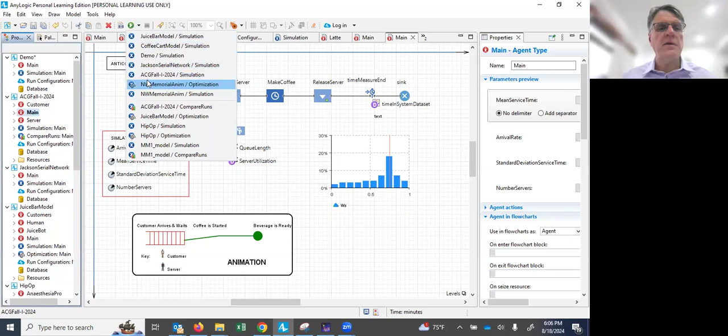I'm going to run it just so you can see how this goes. This is something that I added recently to the simulation. And here we go, I'm going to speed this up. I think you can see what's going on here.

There are customers coming in here, and then when their beverage is being created, they are joined by a server. Let me slow this down maybe a tad. So in every case, you see there's a customer and a server going through together. The servers are the baristas, obviously.

That's what's happening in this animation. This is just a visualization of how customers are flowing through the system here, where they come in, grab a barista, get their coffee made, release the barista, and then sort of head out.

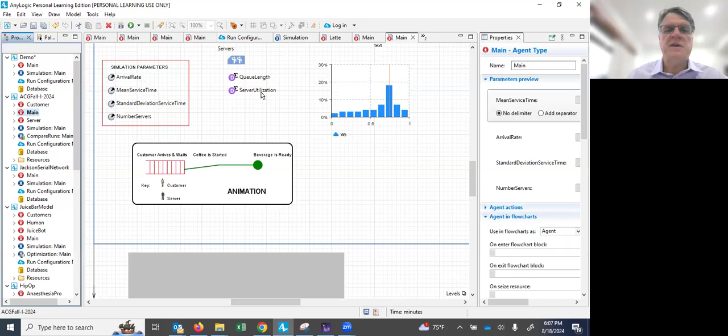Okay, now implementing this thing, what this here is here. Let's just go back and have a look at the setup here. So you can run this in 3D as well. Maybe we should just have a look at that in 3D briefly.

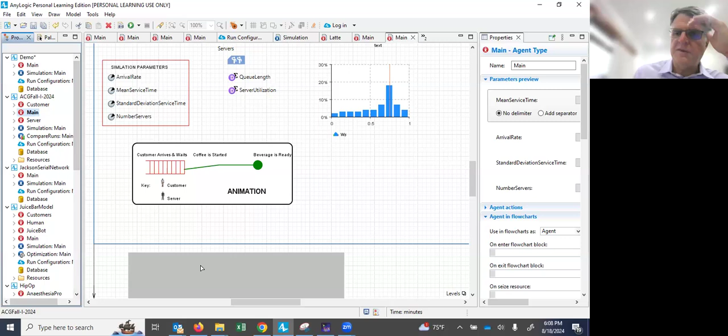I think I've created something that's flat here, so it's not going to be particularly interesting, but you can zoom in here and observe. Hopefully I can get this thing to move. No, maybe not. Well, I hope to do better than this, but apparently my 3D simulation has disappeared. In any case, with a mouse we could do better and observe these, what is a 2D animation here in 3 dimensions in this 3D window here.

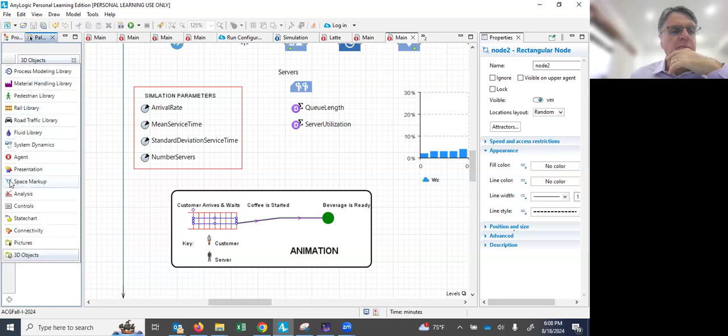All right, so how to set this up? So this first block is actually just a rectangle that I'm coming in from within the space markup palette. So you can see it's one of these rectangles.

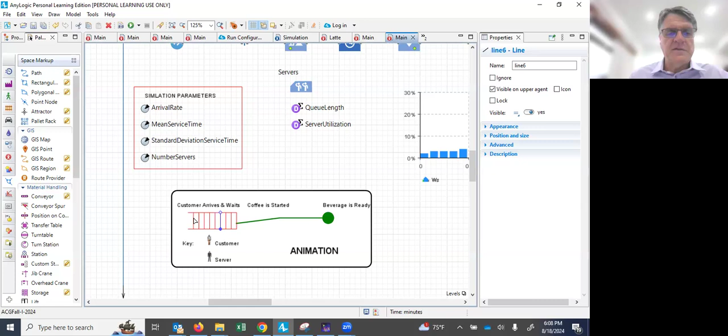And then this here is a path. And this is just simply a large green dot that isn't a particular markup item or simulation block. So this one here, obviously I've just created some additional lines, but it's this rectangle here. We want to see where that connects to.

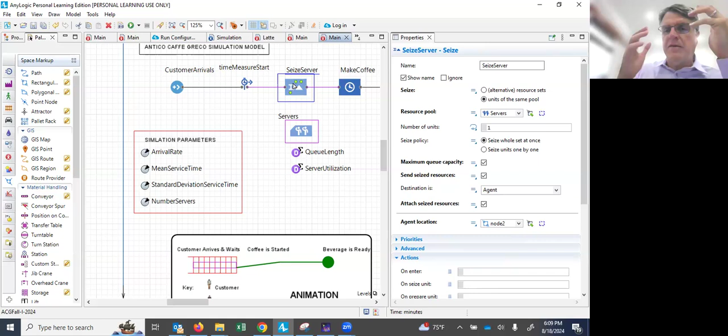So this one is node 2, and I believe it's connected to SeizeServer. So when the customer is in that queue, we actually have them represented here as having arrived and waiting, which is exactly what they're doing. They're waiting to grab a server. As soon as they got the server, their coffee starts.

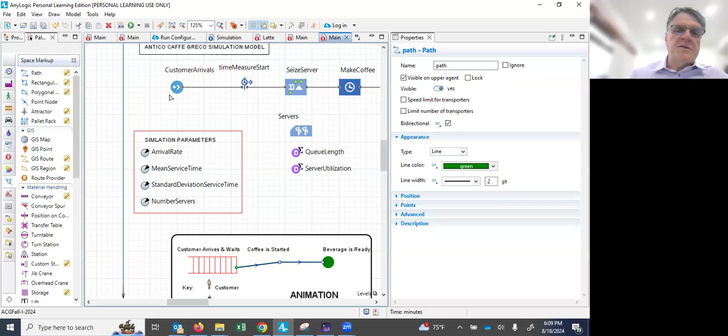And then it's making the coffee connects to this path. And as they go through the service experience, then you're having your barista and your server go through together. Now, the reason why you're seeing both a customer and a server or barista go through here is obviously customers are going through here, but then when that customer seizes the server

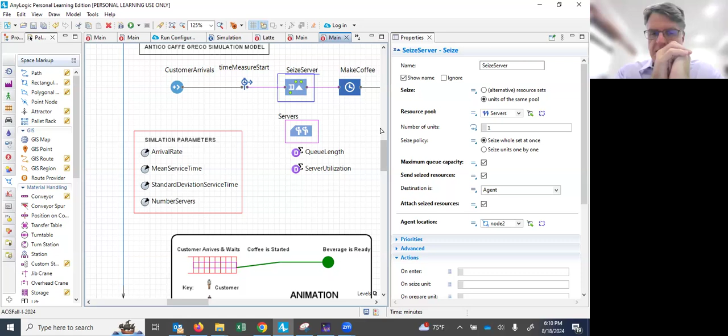it's an agent type, but they're seizing one of the baristas. So let me just go back there. You can see up here at the top, they are grabbing server. So that's why they go through together. There is the customer, but then they've grabbed the barista and they're headed through together. And then at the end here, the server or the barista is released, and then the customer goes on.

Okay, so that's how we've created this. So the red here is just lines that I've created with the presentation.

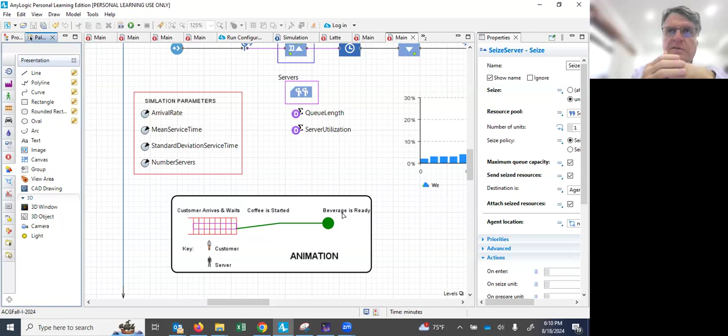This is just a key, this is text again. These text descriptions are freestanding text—they're not connected to the simulation. The only real connections are this rectangular block, which connects to the waiting queue, and then the path connects to making coffee.

All right, so that's the animation, and hopefully animations will appeal to some folks in your decision-making group who may need a bit more visualization than what you're seeing in the model itself. It just makes it a little more transparent, so we have that option.

Now I want to talk about one more thing here, this compare experiments option. We've got this experiment option where we can compare runs—let's have a look and see what it does.

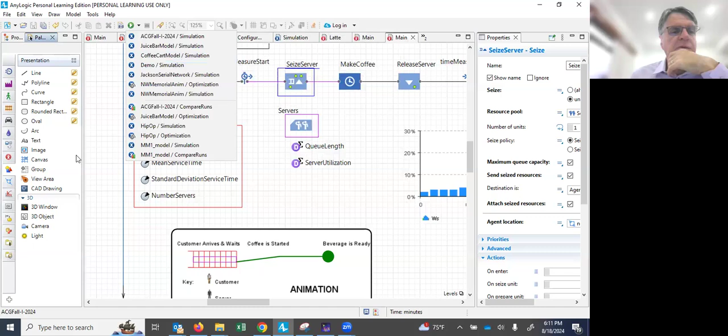It enables you to interactively input different parameter values and run the model multiple times. So I'm going to run the compare—let's go back to our program here. For this, I've got compare runs, and you can see essentially what's going to go on: I'll be able to plug in things like mean service time, arrival rate, standard deviation, and number of servers.

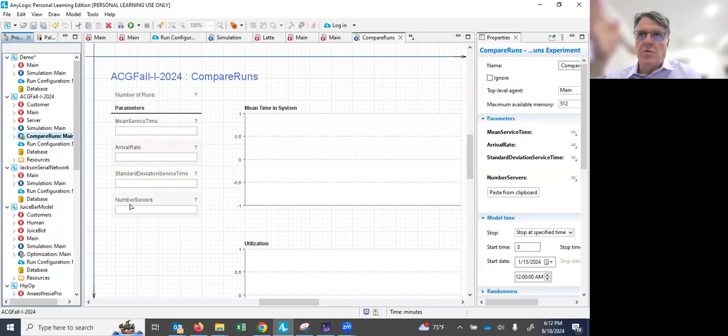These are relevant questions as you do what-if analysis and scenario analysis. We can change them here in the simulation main, either for the original simulation or through this experimental run. So I want to run this one for you—this is ACG compare runs, let's just see how this goes.

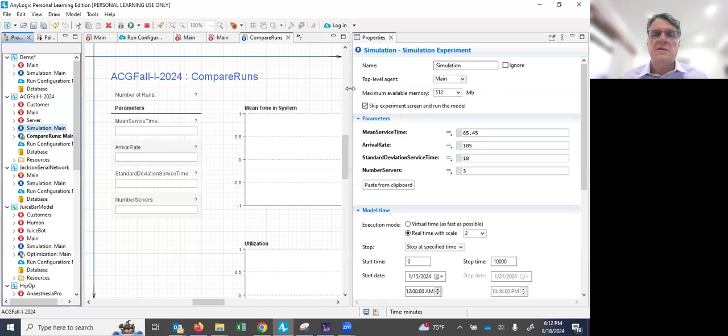I don't remember what the numbers are exactly, but let's go back—so 65.45, 105, 10, and 3 was the original setup. 65.45, 105, 10, and 3, right? And so this allows us to go ahead and run it.

So what this does is complete an entire run. These runs have a specified length when you set up this compare runs experiment. I don't recall exactly how long that is, but if we go to simulation main, we can see my cutoff—I'm using random seeds here and running this out to about 10,000 minutes. That's what's being simulated.

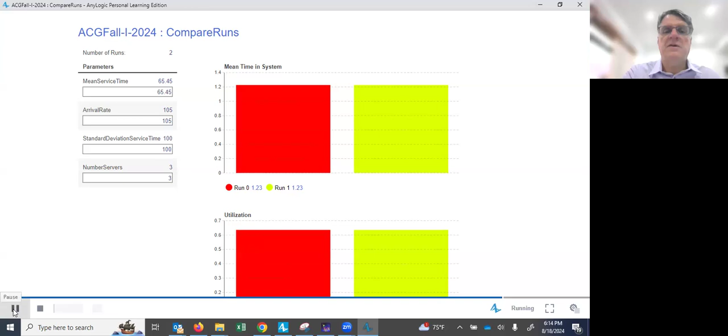Now I could go ahead and run this again—it's identical—but I could also do a side-by-side comparison: what happens if I change the standard deviation from 10 up to 100, say if I don't have trained baristas. Let's run that now—you'd expect the time to go up. Maybe I have to hit that... yes, there we go. And you can see a massive increase in mean time in the system.

The utilization actually remains the same, because variance doesn't impact utilization—the variance of the service time distribution and the variance of the interarrival time distribution do not affect utilization. That's a key insight.

So I think what we're not doing here is using something like optimization, though the ACG case requires experimentation with a number of options—changing the standard deviation to 0 for an automated setup, 10 if you have trained baristas, 100 if untrained. You may also experiment with the number of baristas—that's certainly one possibility, but it's just one of the possible changes to consider.

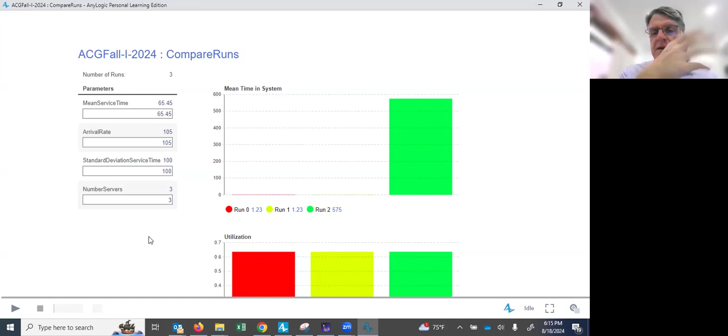It's just that I've chosen not to set this up as a full experiment, but rather just a compare runs experiment. I hope you enjoyed this one.